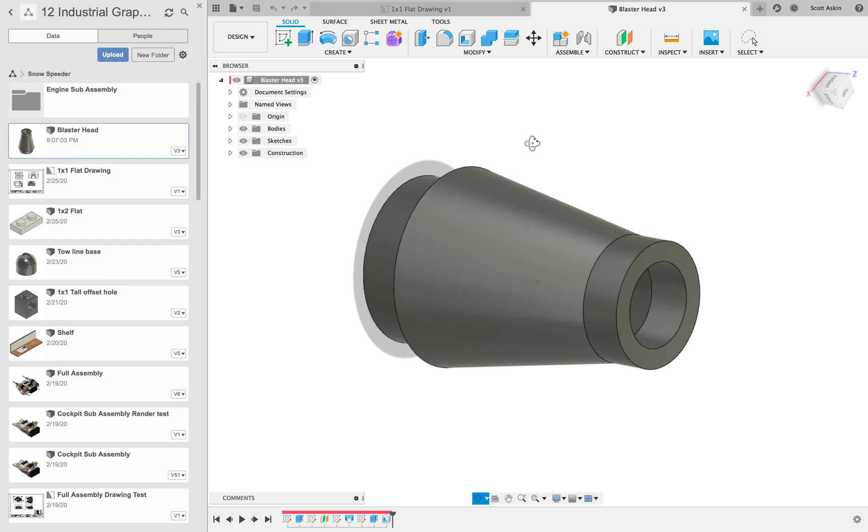I think this is lesson 10. The goal for this tutorial is to get you to reproduce this conical kind of shaped piece of Lego. It appears on the end of, I'm going to call this the blaster, on my Lego Snowspeeder. You might have something similar. So I'm going to teach you the process about how you might go about creating such an item.

All right, so I'm just going to go over and start, File, New Design. And the first thing I'll need to tell you is some of the dimensions of the different sizes of the blaster head. So I'll tell you as we go through, but basically this bottom circular section here is a diameter of 6.5, diameter of 7.8, diameter of 5 and 5.

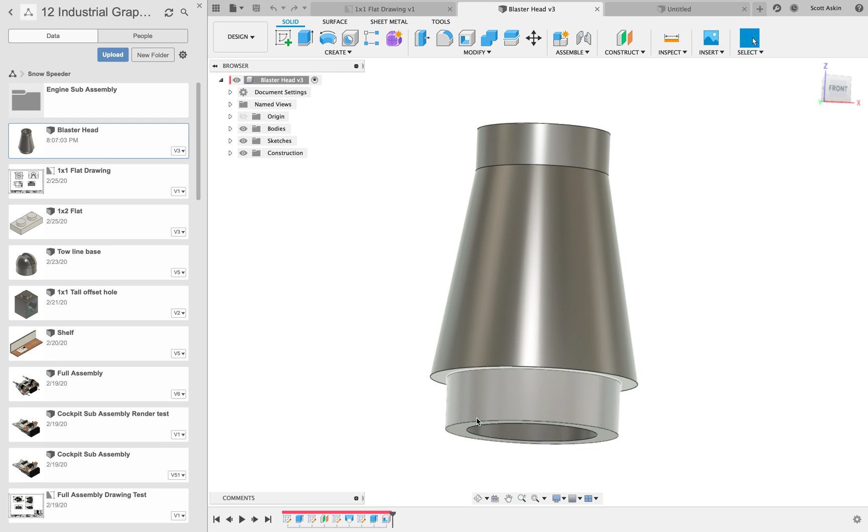How did I know those sizes? Well, I had to get my digital vernier calipers, measure those sizes, and record those sizes on a sketch so that I could reproduce this accurately and not have to go back and measure everything all the time. I also had to measure this depth here with the depth gauge on the calipers, and also the internal dimensions of this hole, or the shell, all the way through as well.

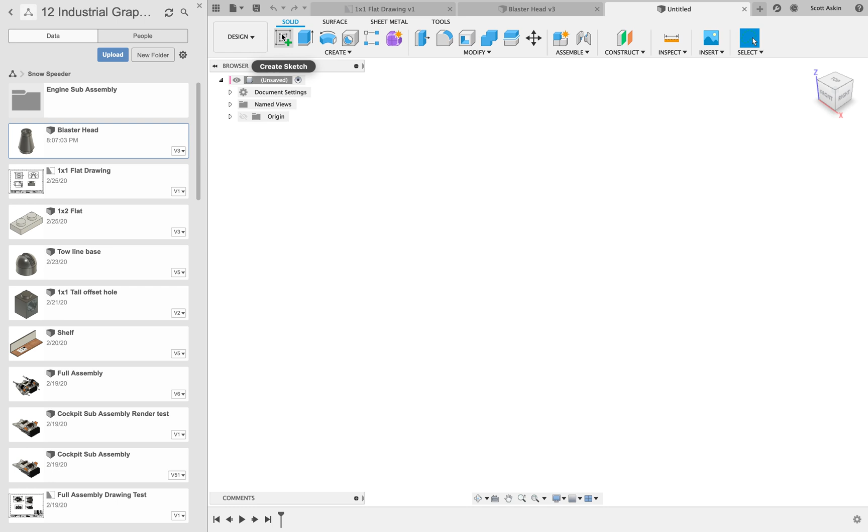All right, so back to my untitled, and I'm going to draw this cylindrical section here first. Then we're going to put a conical shape and then another cylinder on top. That's the workflow of how we go about it. So first of all, let's start this new one. Let's save it, and I'm going to call this one Blaster Demo, and click on Save.

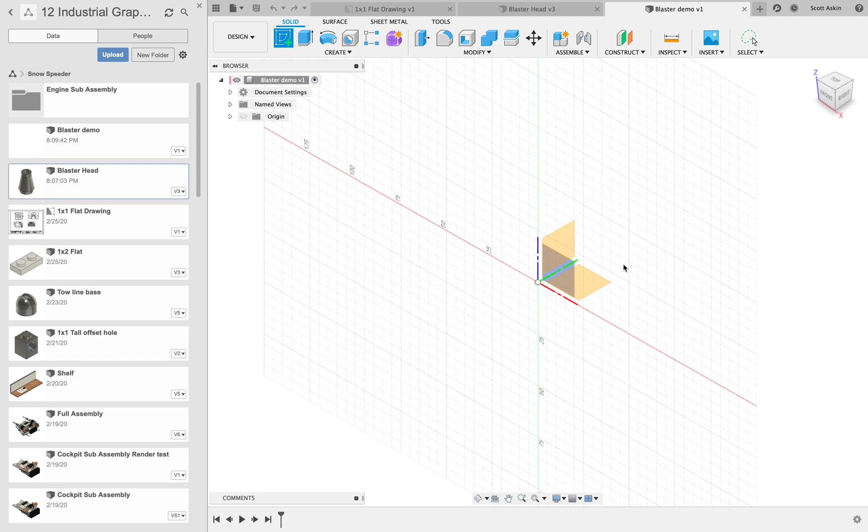Let's go back to Fusion there. It's lagging a little bit. There we go. And then I'm going to put a sketch onto one of these planes to start with. I'm going to assume that the blaster is sitting in a vertical position, so I'm going to start the first circle for the base of the blaster on this base plane. So click onto the base plane.

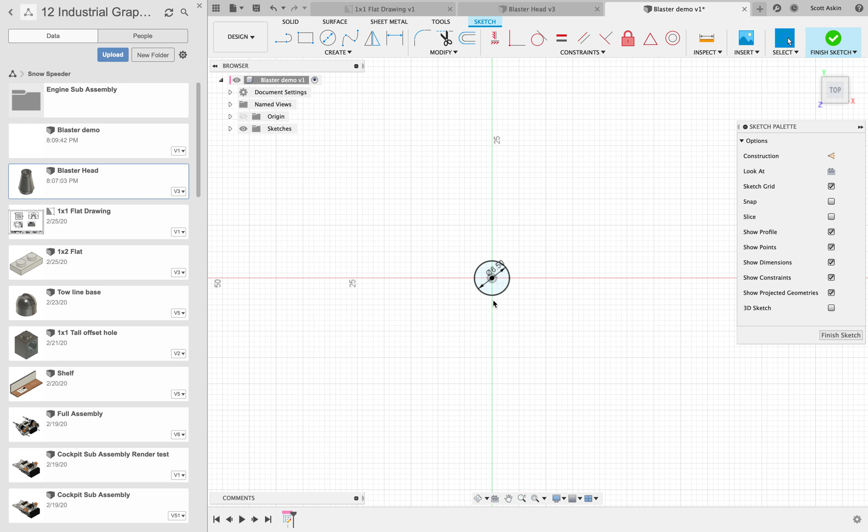Then I'm going to draw a circle from the center to a diameter of 6.5. Enter. And I'm going to accept that as being the only geometry I need to draw for that first cylinder. Click on Finish Sketch. I might just go to the home view here to go 3D.

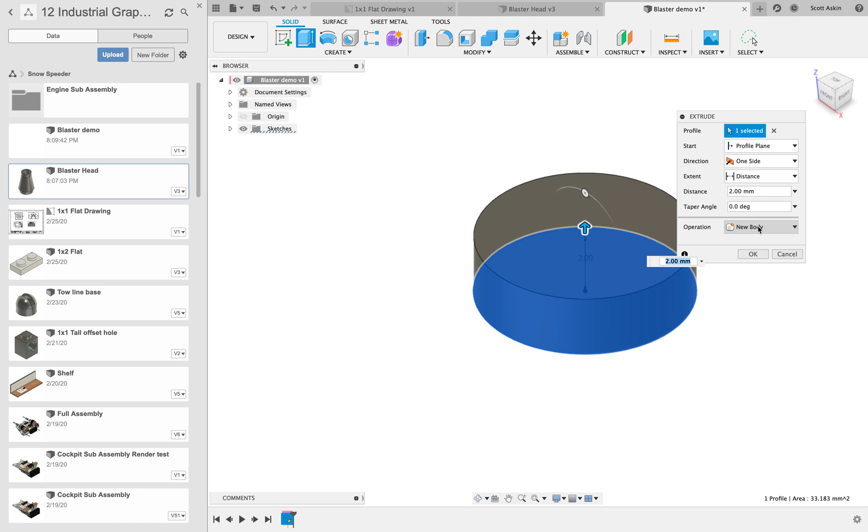And I'm going to extrude this up for the bottom part of the blaster. The distance for extruding is 2 mil. I can click on Extrude first, then drag that up a distance of 2 millimeters or type it in. You'll see here it comes up with new body because it's the first thing that we're doing for this project. Click on OK. So we've got the base part drawn.

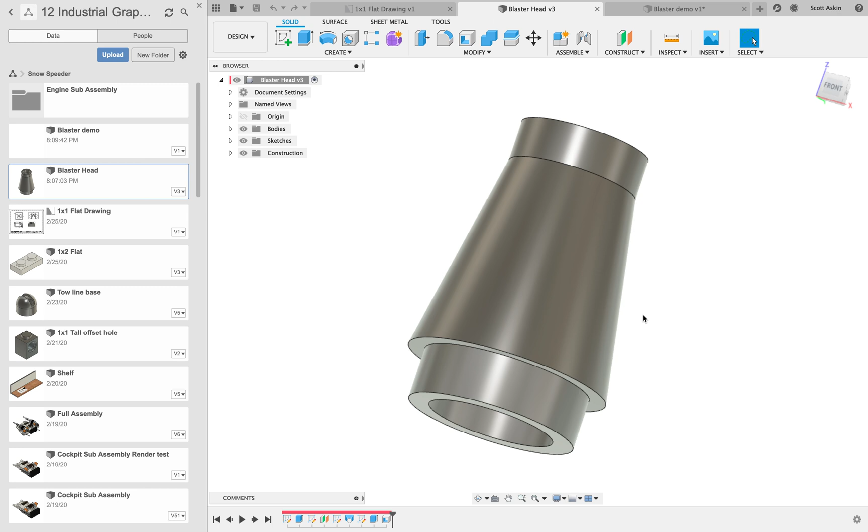The next part is to draw the conical section from this diameter to this diameter here. The workflow is we're going to draw this circular diameter on a sketch on top of the cylinder, then create a new work plane at the correct vertical distance between the two profiles. We'll draw a profile onto this one, and then join the two of them together with a lofting command. If that made no sense, just watch this and repeat with me.

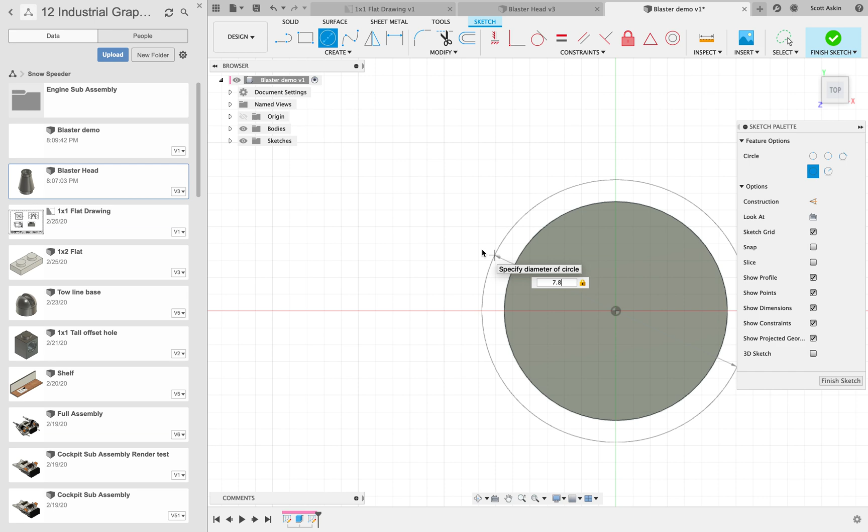So first of all, choose the top of the cylinder, select it, create sketch, and put a circle on here from the center out, and this needs to be a diameter of 7.8. Once again, I got that from measuring with my calipers. Hit enter, and if we just spin that, you can see there's that first sketch. At this point I'm going to finish that sketch.

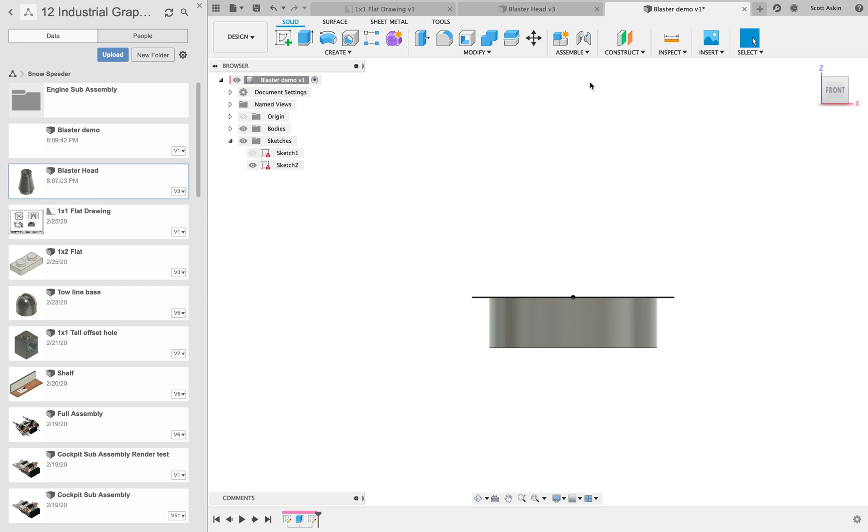If it disappears from view, remember you can always expand the sketches here and turn sketches on and off. If you don't use the sketch for anything, it tends to stay visible. So next we need this other profile up here. The distance from this sketch to the next sketch, which is the height of that conical piece, is 8 millimeters. So I need to put a plane 8 millimeters up.

So just click on the little Construct text here. Here's lots of different ways that you can insert different planes. Once you put a plane there, you can then put that sketch onto that plane. It's a bit like saying, I'm going to place a piece of paper up here, and then I can draw that sketch onto that piece of paper.

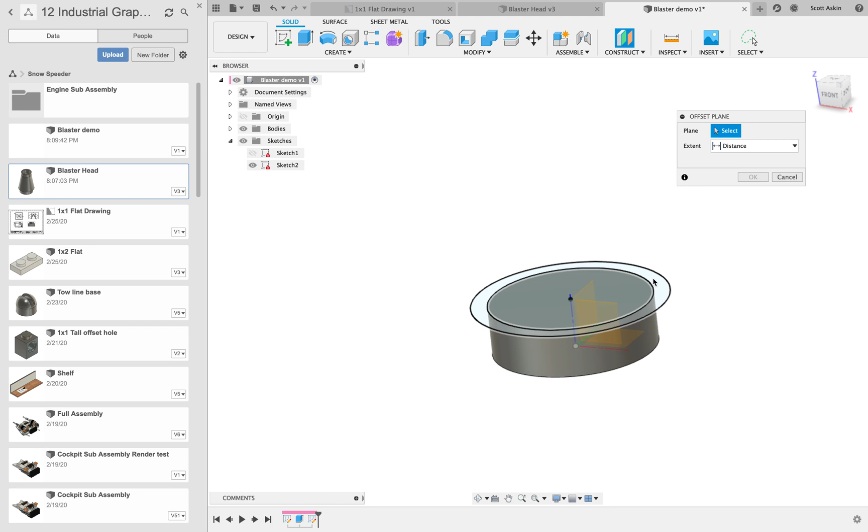The first one that I'm going to use is Offset Plane. I click on Offset Plane, then click onto the plane that I wish to offset from, so not the base plane, but this one here. It's asking how far away from this plane do you want the next plane? So I'll drag this up, and the distance, if you measured it with the calipers, happens to be 8 millimeters. I hit enter or OK, either one.

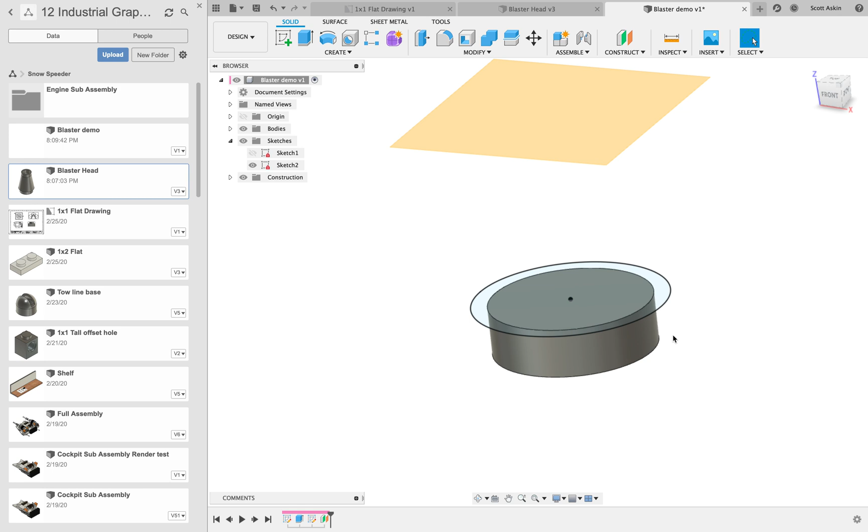And I'll just shift, you can see there's that yellow plane, unused at the moment, sitting up there above this sketch. Now when you put a plane in, it then creates this, if it's not already there, this sort of list. Expand that and you can see that is actually plane number 1. I can turn that off, I can turn that back on.

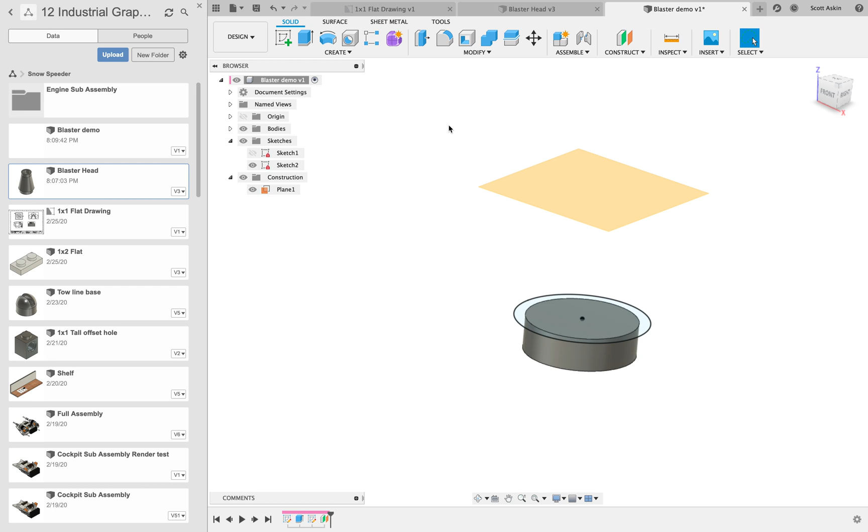Alright, so I'm going to put a sketch on here, and I'm going to put a circle directly above the center of the first one, but its diameter is going to be 5. So go to sketch, select the plane. This one here is the one you want to draw on. It spins it around. C for circle. Use the same snap center point. Click once, drag out fraction, type in 5 and hit enter.

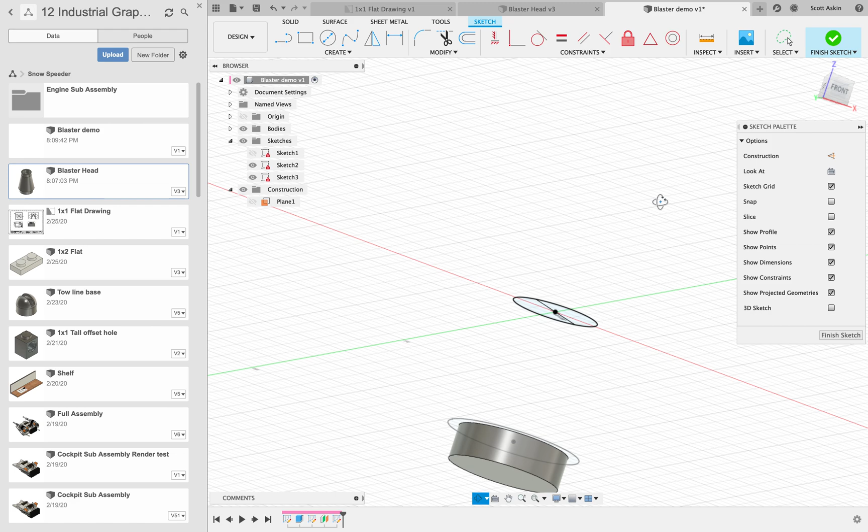We'll just turn that side on so you can see what's happened. Okay, you can see there now I've got two profiles, one drawn up here and one drawn down there. That's what I'm after, so I'm going to click Finish Sketch. And then we're going to use a tool called Loft. And you can see here in the preview, it creates a transitional shape between two or more sketch profiles or planar faces.

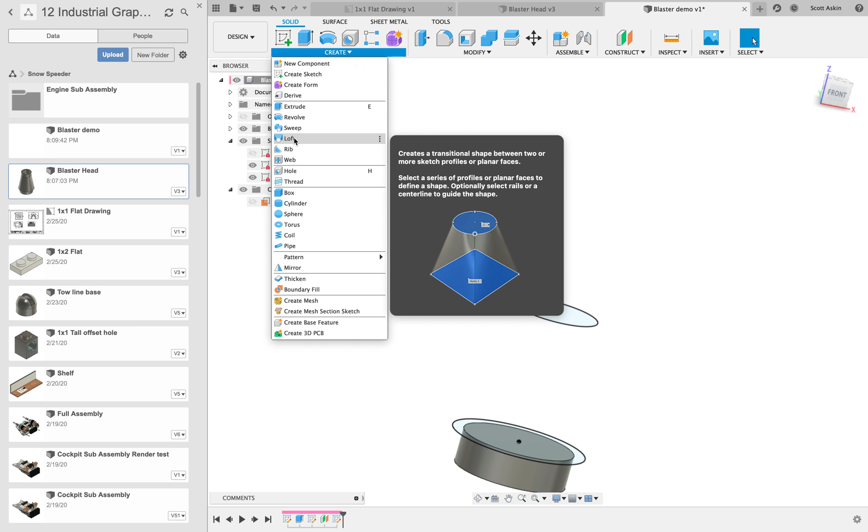So let's click on Loft. Where are you? There it is. And this dialog box comes up. The first thing it's asking you for, well, where are the profiles that you want to loft between? So if you click on the little arrow there, select the top one, and you see it stores profile 1. Click on the plus symbol, and then click onto the bottom one, on the outside edge there. Oh, I think I got it. There it is there. And you can see now it's jumped to the outside edge.

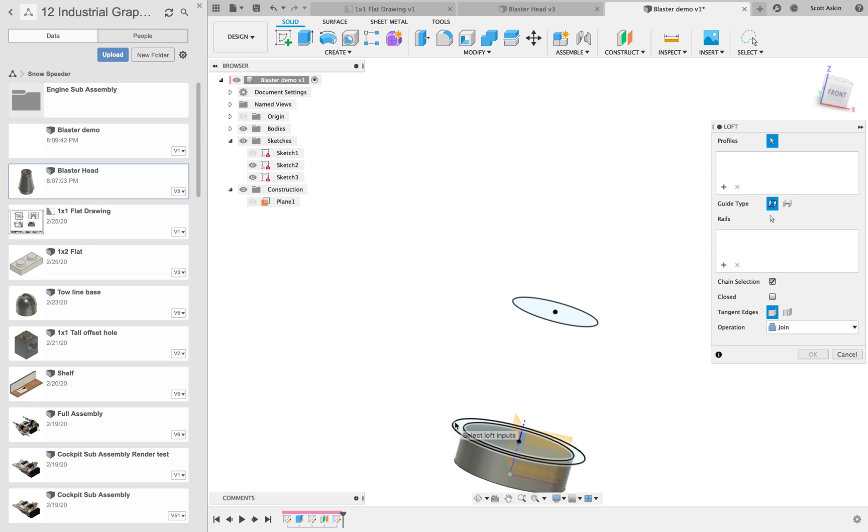If you made a mistake, you can just simply select the one you want to get rid of and click on the cross. Go right back to selecting nothing. I'll try that again. Select profile. I'll do the bottom one this time first. Then I'll do the top one. I'll click on plus. And you can see now that lofting between those two profiles. Okay, so that's really as simple as that.

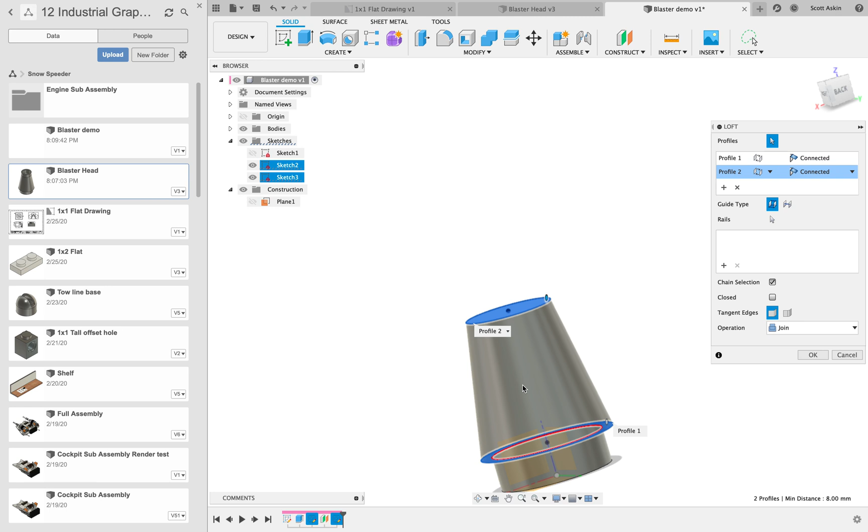Don't worry about guide, type or rails. All this should be pretty much set, and it should guess that it wants to join this extrusion or this loft to the existing one. Click on OK, and let's have a look. Yep, that's good. And the last thing to do then is to simply put another cylinder on top here.

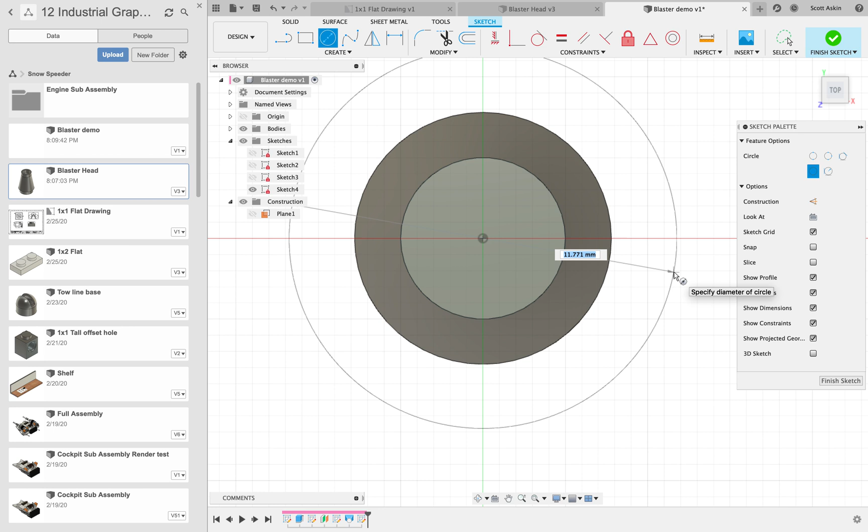So let's select that top surface, select sketch, C for circle, and this one needs to be exactly the same diameter. And in actual fact, I don't need to draw this again. I can use that same sketch. So I'm going to jump out of that actually. Just going to escape out of that and say Finish Sketch. So if we have a look back here, that was the sketch. And you can see all these sketches except for the last one are turned off.

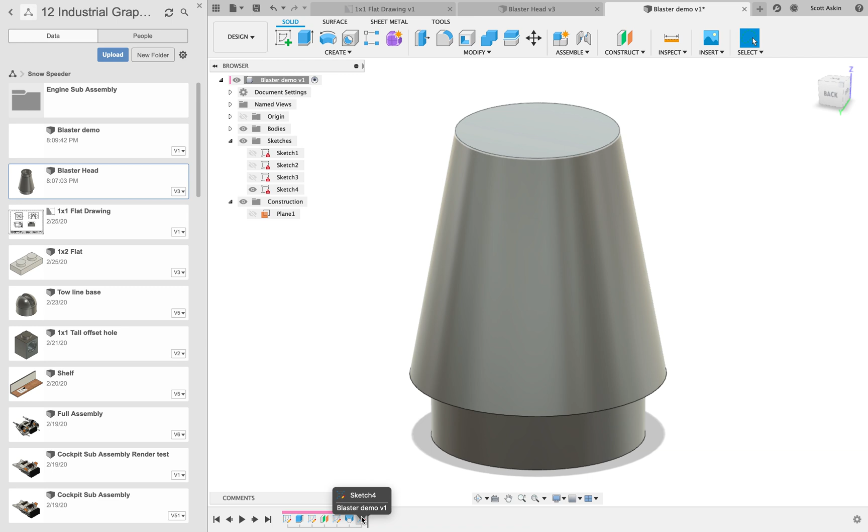So the last one there, which I think I just created, which I shouldn't have. So I'm just going to delete that one. If I can, it lets me. No, it's not being very nice to me. There we go. So there's my 3 sketches. You can see 1, 2, and 3. And I used that sketch to go between this bottom profile and that profile. I can use this sketch again, provided I turn it on, for the last extrusion.

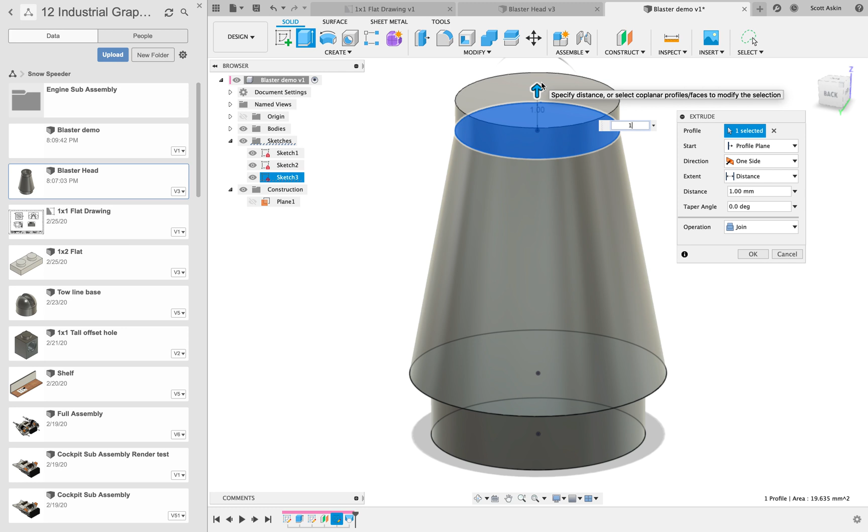So if I select that sketch, you see it there, I can select it like so, or I can select it down here in the timeline. Click on the extrude button. Oh, it's asking me to select it again. Okay, we'll do it again. And then drag it up the necessary distance, which in this case is 1.6. Check that it says join. Click OK. That's good. And then the last thing to do is to shell the whole thing out.

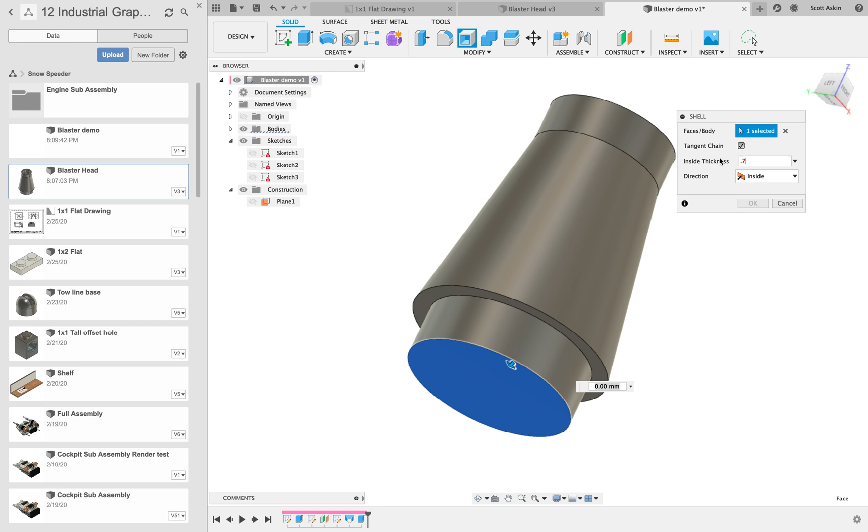Now with this one, we're going to remove the shell from the top and the bottom. So what I'll do here is I'll select the bottom surface. I might just turn these sketches off now. I'll select this bottom surface, it turns blue. I'm going to click on the shell tool. And this time though, the shell's not 1.45, it's actually 0.75 if my memory serves me correct. Yep, 0.75. And if I spin that around, you can see it still hasn't hollowed out the top.

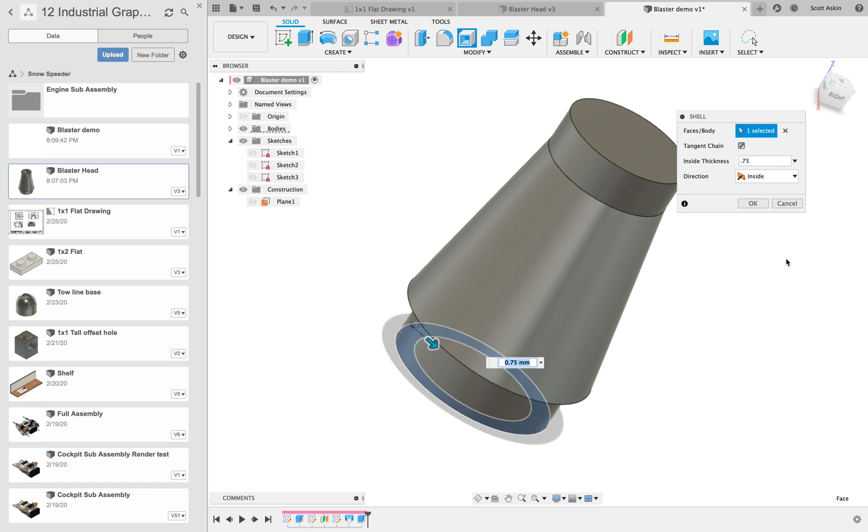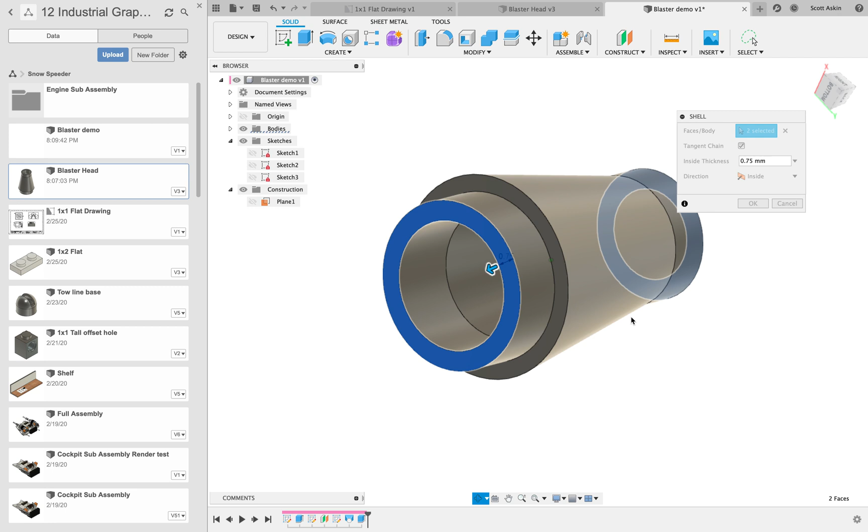So what I'll do now is holding the shift key down where it says one selected. I'm also going to select, hopefully, that top surface. Oh, I think I needed to do that before I actually put the numbers in. So I'm just going to cancel that, try that again. Select the top surface, rotate, hold down shift, select the bottom surface. Now both surfaces are selected. Yep. Click on shell, type in the distance 0.75, and now you can see it's removed the top and the bottom surface from the shell. Good. Click on OK, and your blaster head or conical shape is now finished.

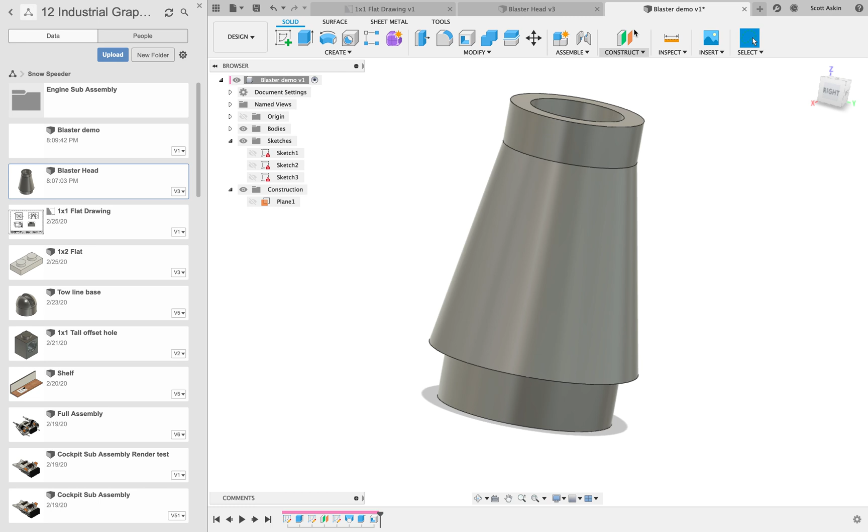So the main thing there I wanted you to realize was how to use the lofting command to go between two profiles, and also how to use the offset plane command to create that plane out there so you can actually draw it out there in space. Okay, have we got that one, people? And we'll do the drawing for that fairly soon as well.